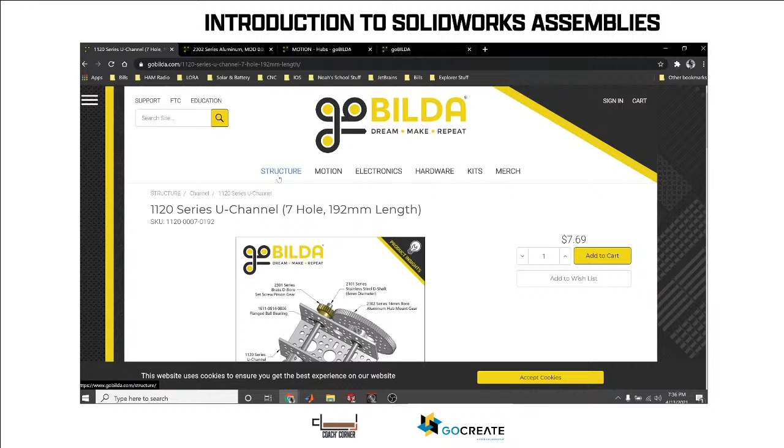But in the meantime, let's take a look at using some of these parts to make an assembly. I just wanted to start with something really simple. So when you go to their website, you'll be greeted with various types of components. If we go to structure, you'll see they have various types of rails, beams, tubings, couplings, pattern plates, all that stuff.

We're gonna dig in - I'm gonna put my do not disturb on. We're gonna dig in for now on the channel, and scroll down, and right off the bat you can see some of their application photos. We're gonna go ahead and go to the Series U channel, and take a look at this 3-hole length.

What's really cool, and what turned me on to this product, is they not only give you specifications for the channel, like drawings, but they also give application examples. They literally show you examples of how to do various configurations of the product.

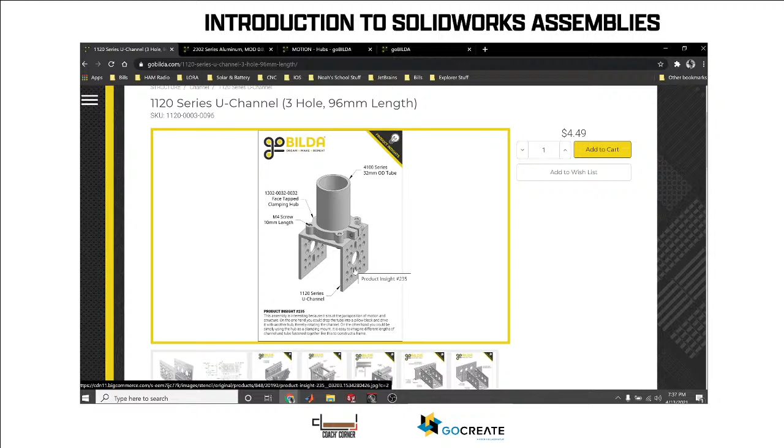I'm just clicking through these quickly. There's something where you could take a tube and adapt it to fit on a square platform. Here's a kind of want-to-be gearbox. They're making beams here too. I was talking to Brian, the guy that owns this company, and he mentioned that when you put these together as a beam, they can support a lot of weight—he was prototyping something that held the weight of a corner of a vehicle. So take that and put it in your back pocket, okay?

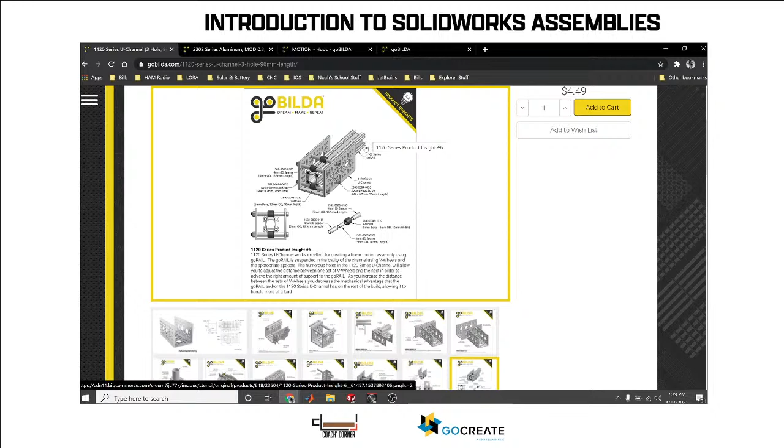These are just application examples, so if you're trying to get an idea of how you could use this—right off the bat I can see this and think, holy cow, I could take this and build this assembly using a very long piece, and now I have a camera slider. If you're looking for that super buttery smooth camera footage where you can pan across a scene or zoom in and out like a camera dolly, you could build it with these parts.

Today we're going to attempt to recreate this construction. And by attempt, I seriously mean attempt, because I don't think I correctly identified this gear, but anyway, let's get right into it.

We'll start off with our first part. What I'm going to do is go to the New dropdown and say New Assembly. Right off the bat, as soon as we hit New Assembly, we're greeted with Begin Assembly on the left hand side, which says select a component to insert and place it in the graphics area, then hit OK to locate it at the origin.

Or top down using the layout with blocks, parts may then be created from the block. We're going to keep this hopefully relatively simple. This part, 1120-0003-0096, should be our rail, so we click that and it's now in our graphics area.

But here's the kicker—you'll notice as soon as you put this first part in, it's got this little F that signifies the part is fixed in location. And if I hover over the origin for the assembly, the origin is way over here, but the origin for this part is way down here. So that may not work for what we want to do.

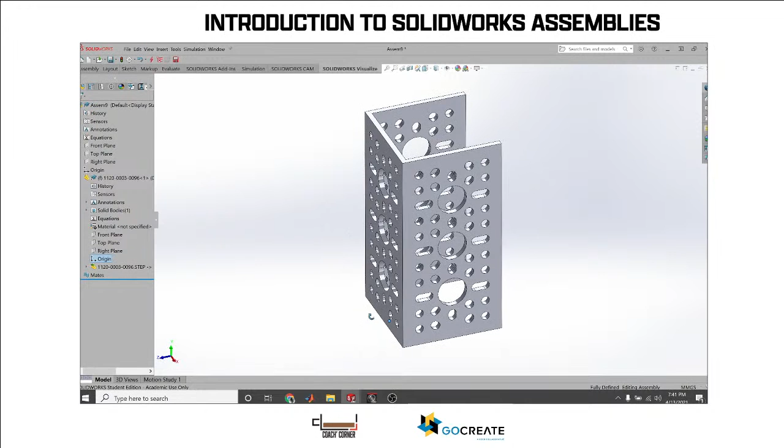Let's say I wanted this part, and this center circle right here, to be aligned with the origin of my assembly over there. Now we're about to learn the wonderful world of assembly and mates.

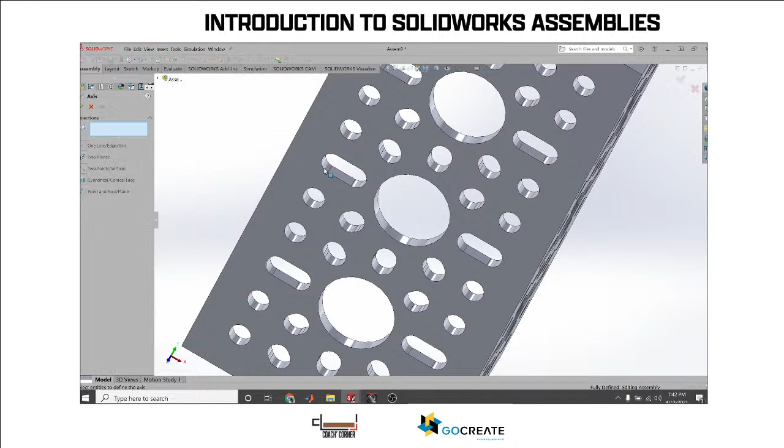The first thing we're going to do is create some reference geometry on this particular hole. I'm going to click a point and try to see if I can just place it—maybe not a point, let's try an axis. Cool, so we get this little yellow line that gives me my axis.

That looks relatively promising. Let's see if I can—first let's just look at it from a view here, a top-down view. Oh actually, that's not what I want to do at all, guys. Let's get rid of that axis and make our first mate before we get too crazy.

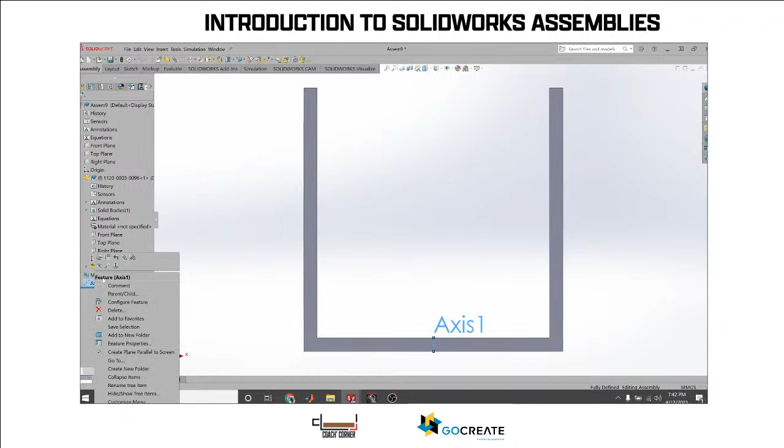What I want to do is mate this face with the top plane, but it's not immediately shown, so you have to click this dropdown on the left and choose the top plane from the assembly, not the part. So we click here, and we're going to make it coincident.

Oh, you know why it's not going to work? I'm sitting here going on and on about fixed. We need to make this float first. Okay, so now this is floating. Man, I'm just really messing you guys up today.

So we mate, then we pick our top assembly, and there it goes. It snaps to align with top assembly, and it almost kind of looks now like there's a floor, because you see that reflection over here off to the side. So I like that. I'm going to go ahead and click the check mark to accept that.

And then I'm going to pan, holding the control key on my keyboard and clicking the center scroll wheel on my mouse.

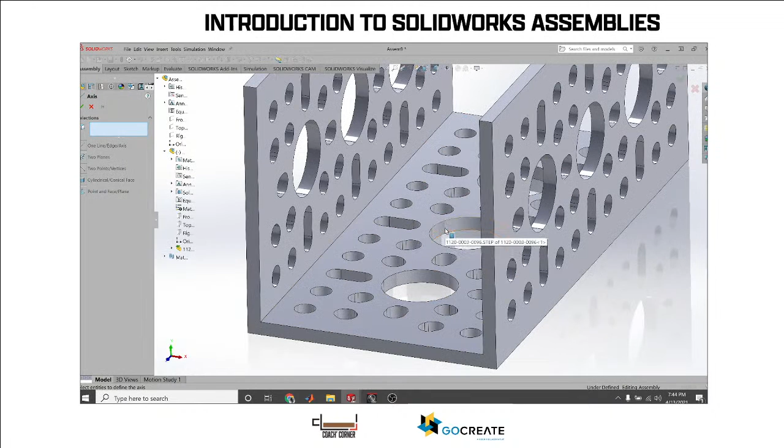And let's try again to create an axis here. So click axis. We will go... actually, dude, I want to do one more mate, I think, to make this like super cool.

So what I'll do is I will actually create a plane between this face and this face, and you'll notice how the plane automatically is smack dead in the middle. So I like that, and I'm going to go ahead and hit OK because that's what I want.

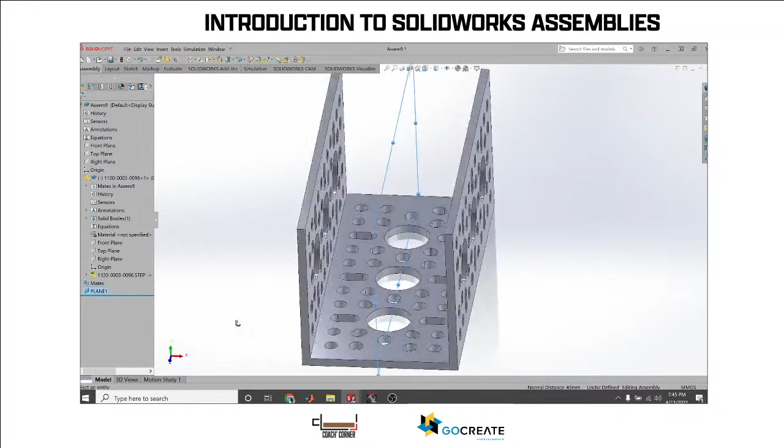And then I think I could do one more plane instead of trying to do the center point right here, that would help me align this a little better. So I'm going to click on this face, oops, let's delete this as our reference, and we'll click on this face. And again, now I have my plane directly in the center of this part, so I'm pretty happy with that.

So let's make this front plane... oh no, sorry guys, getting ahead of myself again. Let's erase that plane. We don't want that plane there. We do not want this plane right there.

Okay, what we actually want to do is edit this part. So we right click on the part, the super long convoluted name, right click on that, and then we go to edit part.

So please save it before editing imported component. Okay, so I'll just go ahead and save this as, we'll put it on my desktop for now so I don't get it mixed up with anything. And we'll call this GoCreate-GoBilda...

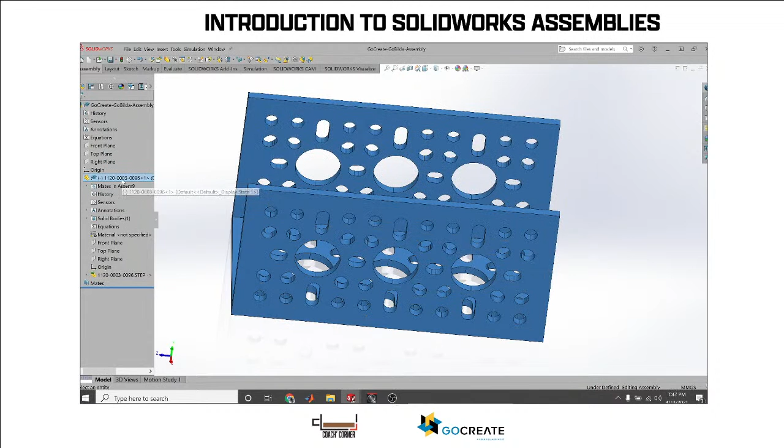Cool. Now I'll try to edit my part. Awesome. So here we go. First, we create reference geometry.

So create a plane. We want to select this face, and we want to select that face. And again, it's right in the middle, so we're happy with that.

And then I'm going to create another face between here. So we create a plane here and here. Got that centered. Cool. So we should have two planes, 1 and 2. Perfect.

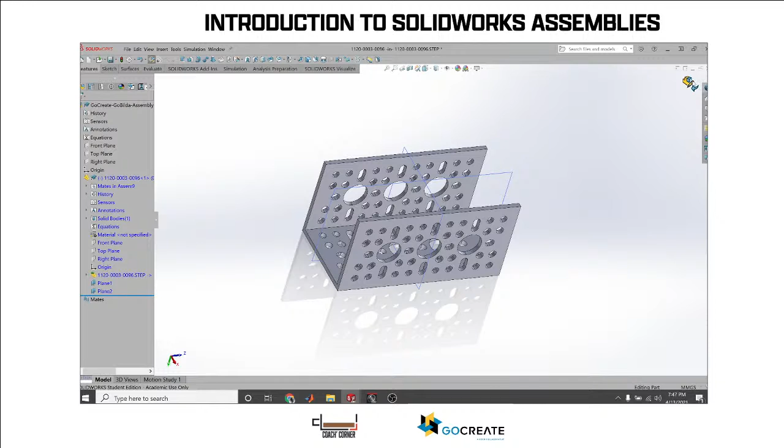To exit editing this part, we'll go ahead and just use this little icon up in the upper right hand of the graphics screen. So we'll exit the part.

Alright, cool. So now I'm going to take this plane, click on the mate. This is like a little flyout menu, so when I click it, there's a flyout menu, so we click mate, and we are going to mate this with the right plane.

Nope, the front plane. Perfect. We accept that one, and then we click on plane 2, and this one will be aligned with the right plane. Perfect. Like it.

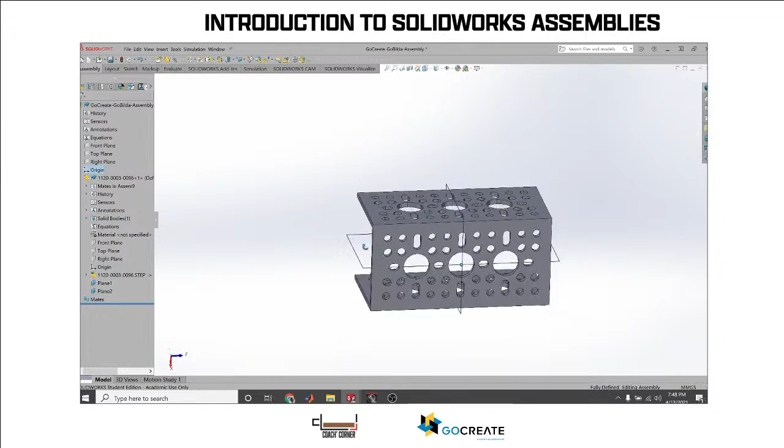Awesome. Now, if we take a look at origin, our origin is literally smack dab in the middle of the part. So I'm very cool with that. Actually, it's in the center of the bottom of the part, but I'm not going to continue pursuing this.

So we'll hide that plane, just keep things decluttered. Alright, awesome. Now, let's bring in another part.

So we'll go to our assembly, and up in the top portion here, we can insert components. But before I do that, I want to make sure that I've got the right stainless steel 6mm. So it's 2101.

So what we can do is go to our SolidWorks. We're going to go to File, Open. I've actually got all of these things saved, so it's going to be a little bit easier for me to find what I'm looking for, I think.

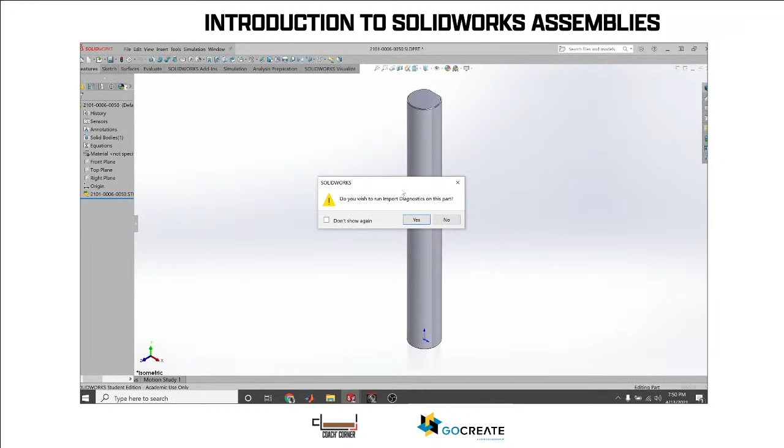So goBILDA shaft, D-shafting, and I think they are talking about a 6mm, so it should be 6mm. And I'm just going to take a wild guess. Pick. Yep, okay cool, and awesome.

So let's go back to our assembly. And up in this menu area, there's the little icon that says insert a part or insert a component. So we'll click that, and we have our opened parts to choose from. So let's click that. So there's a bearing.

I want to click that one more time, and let's see what this one is. This is a shaft.

Let's see, what is this? This is a pulley, or sorry, a gear.

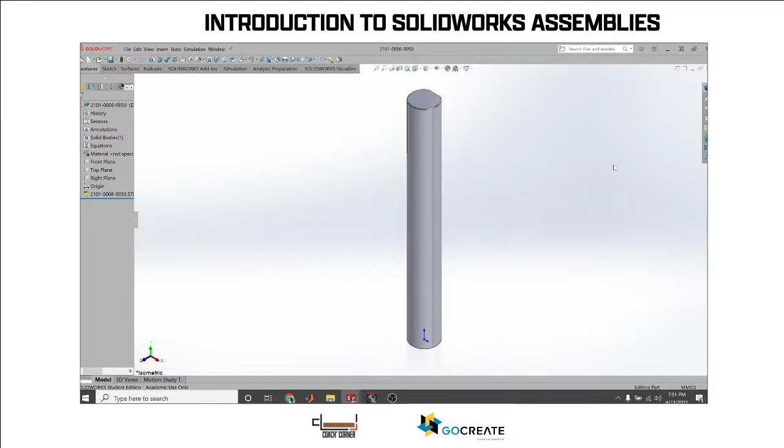I should be seeing some more than that, so let me. Okay, so this needs to be saved. I need this gear here. Also need this as well.

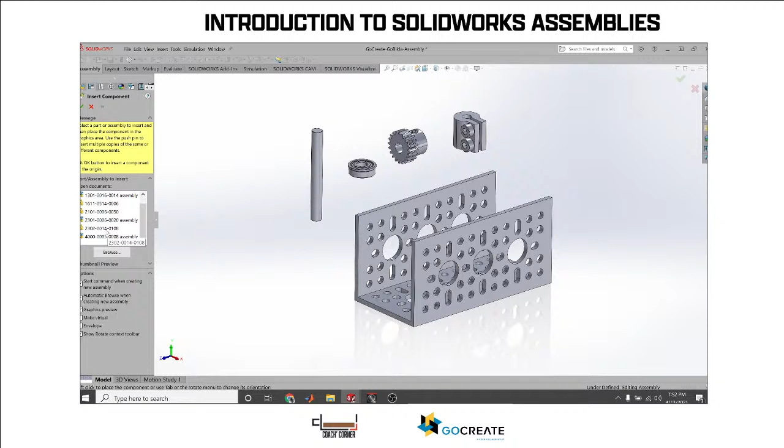So now if I go back to this assembly, I wonder if it'll let me. Yes, yes it will. So here's our clamp hub thing. We need, what is this? A gear.

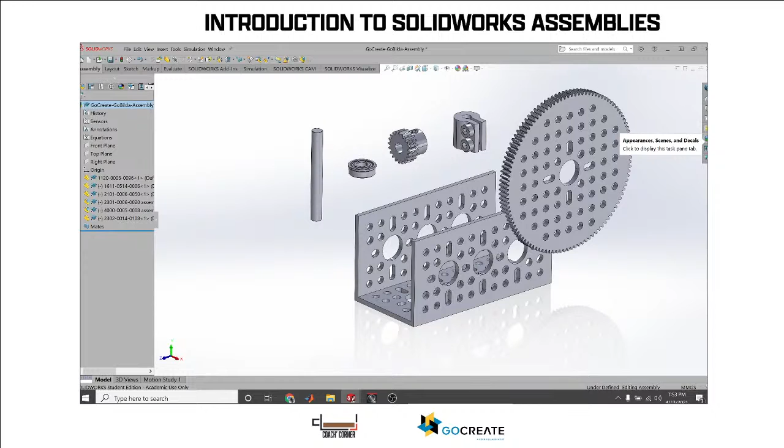To make things a little bit easier on us, I'm going to adjust the colors on all these various parts. On the right hand side, you'll notice this flyout menu with the multicolored ball. It says appearances, scenes, and decals. I'll click that.

I'm going to go to painted. This should give us enough options, so I'll make the rail be this blue color. I'll make this gear be a nice cool gold color. I want to do the same thing with this gear here.

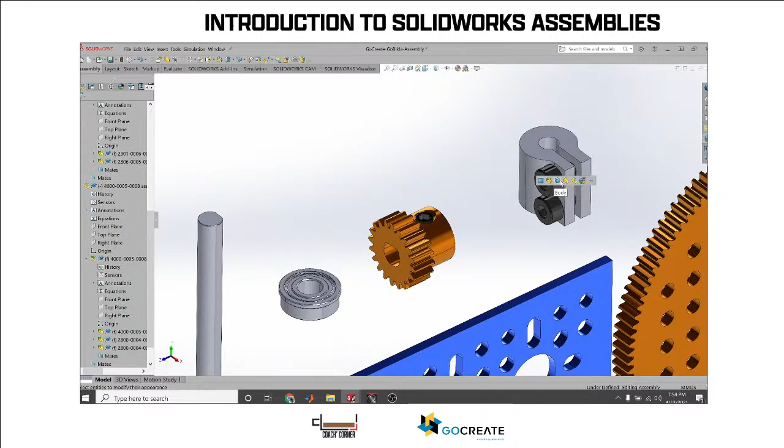And you'll notice, if you really want to get super Gucci with it, you can also change the hardware color. So now our hardware has like a cool anodized look to it.

Let's leave our bearing silver because, why not? So let's do this metallic cool gray on that. Same thing with that there.

Okay, awesome sauce. We have all of our parts, but you may notice that they look like we need some extra parts here. So let's highlight some bearings because we know we need 4 of these.

So we'll hold our control key and hover over the title and drag a new one on. We'll place it right over there. We'll do this again, and we somehow got ourselves 2 because we were holding the control key and doing that.

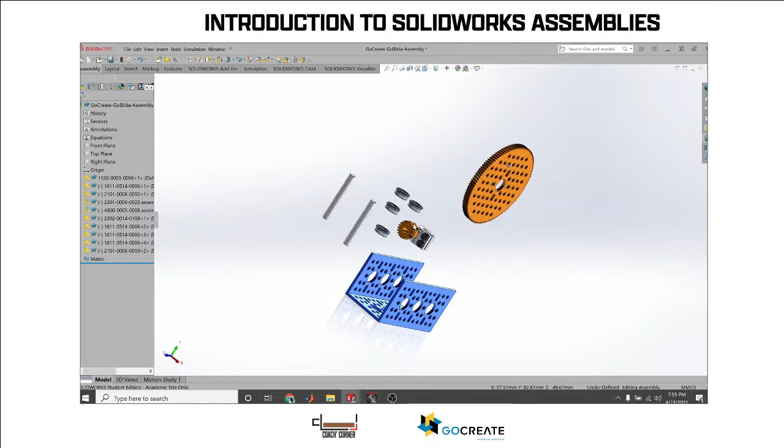Let's see, I need 1 more of these shafts. Full disclosure too, guys, this gear may be entirely too big for the meshing of these gears to take place, but that's neither here nor there.

So let's start with making a mate for the bearings. To do this, we simply click on our first face. This flyout menu comes up and we'll click mate. Okay, and then I'm going to click on this round face here.

I could click on this circular line, but because I clicked on this face, I want to click on this face as well. You'll notice that it kind of infers, either on this flyout menu or the one to the left, that it's seeing 2 round objects. These things should probably be concentric.

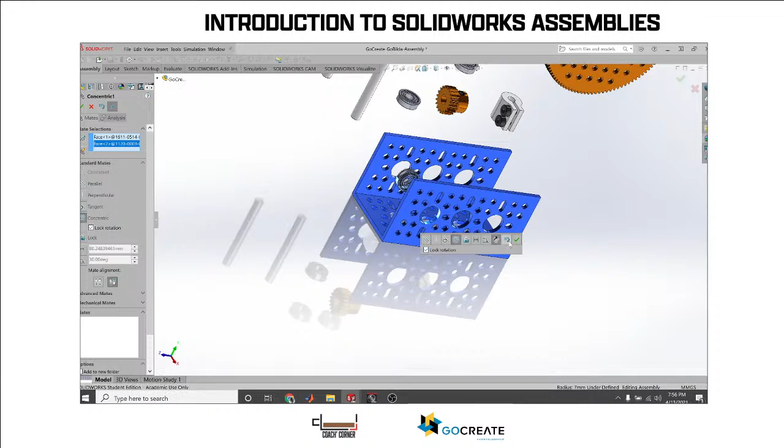And in this case, they're correct. We definitely think these should be concentric. And then, of course, you can lock the rotation. So for now, I'll hit lock rotation and the check mark to approve this mate. Then I'm going to come over here, zoom in still, and get this face.

See if they'll let me. Yep, get that face. And then I'm going to come over here and hit this face. You'll notice that it infers it should be coincident, meaning they are in the same place where they meet. They don't intersect each other, but one face mates to the other face. So we'll hit add or finish mate.

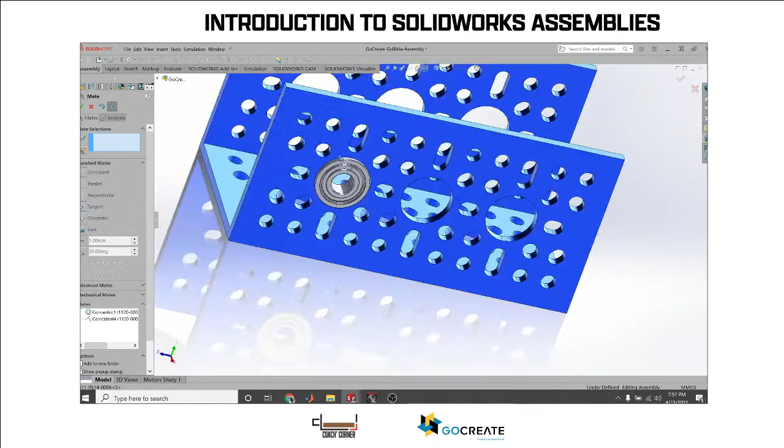And we have our first bearing in place. I would like to add that these bearings, I think the GoBilda people actually have bearings that have a D shaft, but I could not find it in their repository, so whatever.

So you'll see that it's locked. Like, I'm trying to spin it, but it doesn't want to spin. Okay.

So what if we wanted that to spin? Well, first, let's take this and fix this again so that it would spin theoretically. But if you really wanted that to spin, this bearing's outer sleeve may not spin - it would probably be fixed in place, but I'll just click this.

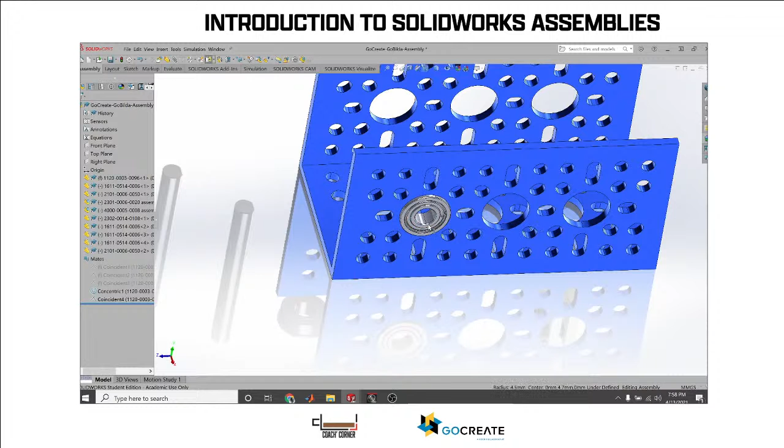I'll right click it and hit edit feature. And then here you can just unclick lock rotation, check mark once more, and now the bearing is moving. But I don't like that, so I'm just going to lock my rotation back up.

Okay, let's do this another 3 times. So we click our face, we mate, let's click this face here, lock rotation, and I like that. I want to get this face here, that face there, coincident. Okay.

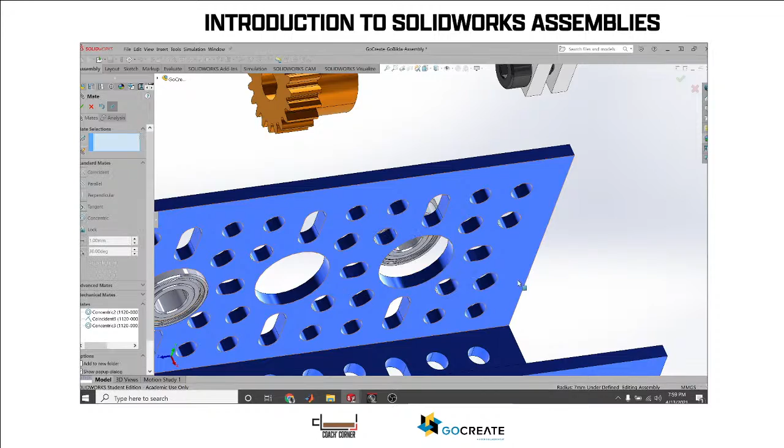That one, lock rotation, accept. See, I can just get that face. Nice. That face, accept. This face here, lock the rotation. And I can do this face first if I want, and it goes transparent. So now I can just come over here and say, right there. Notice how I click through.

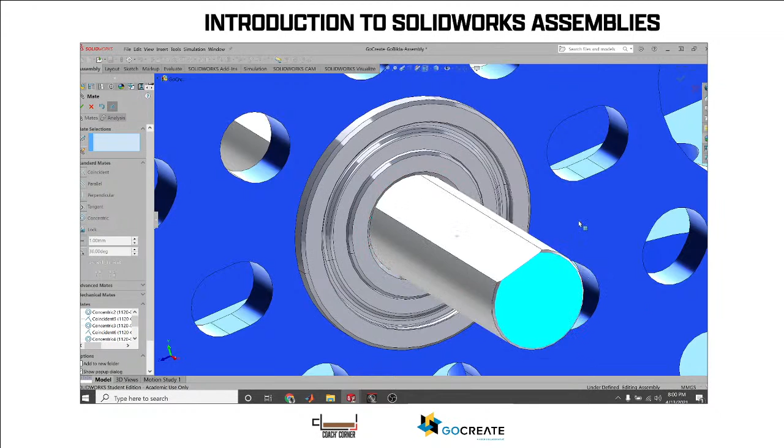All right, super cool. Now let's try another mate. Let's see what happens if I click this face and I click the inside face of this. It will again make it concentric, but this time I'm not going to lock the face, and you'll notice I can spin it, and I can also push it in and out while I'm spinning it. So it still has some degrees of freedom that we can lock down.

But for now, honestly, I think what I need is probably some longer shafts, because that's not going to be enough. So let's go here, let's click browse, GoBilda shafting.

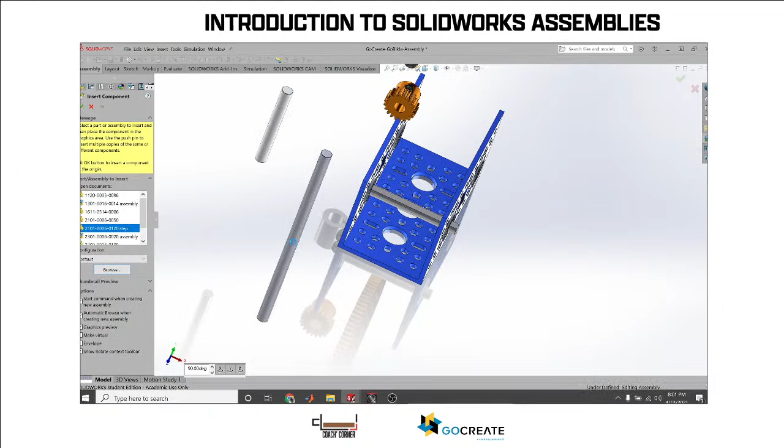Okay, shafting. I'm gonna change my filter. Let's get something gnarly, let's get 120. That's gonna be entirely too long, but I don't care. So let's see, let's drag on this cool metallic color. That seems legit.

What part is this? We'll go ahead and get rid of this part and accept the deletion of this concentric mate. Same thing here, get rid of that. Yes, okay. Control click to get two of those bad Johnnies. Perfect. Click this face, fly out menu, mate. Concentric, not locked rotation. Let's do that once more.

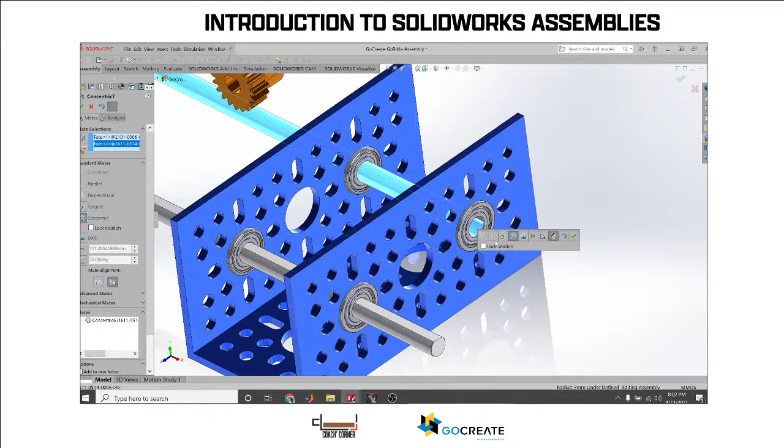Okay, let's take and add our gear to—ooh, let's not do that. Let's clear that selection for now. So on this first gear, it's got this little D-shaped bore on the inside there, and that prevents this gear from slipping on the shaft. So we'll obviously want to take this flat face and then come over here and select that flat face.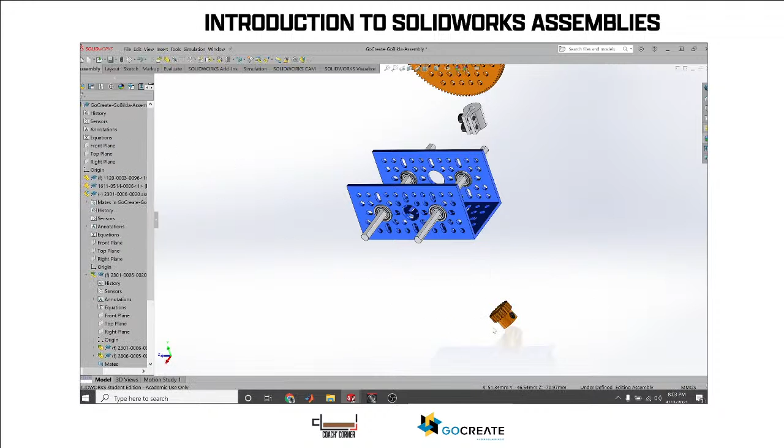And yes, that should probably be concentric, I think. No, there's some weirdness going on there. So let's go and get rid of that last one, let's get rid of that. Yes.

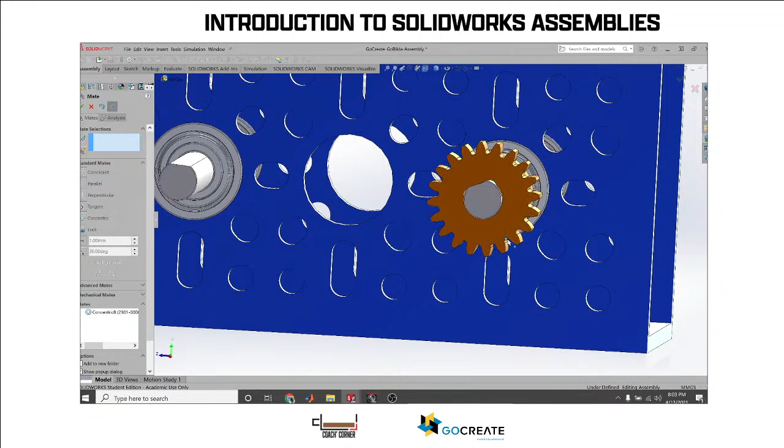I'm gonna make an attempt to say concentric. We'll flip directions, hit OK. But now it's not. Let's see if we can do this.

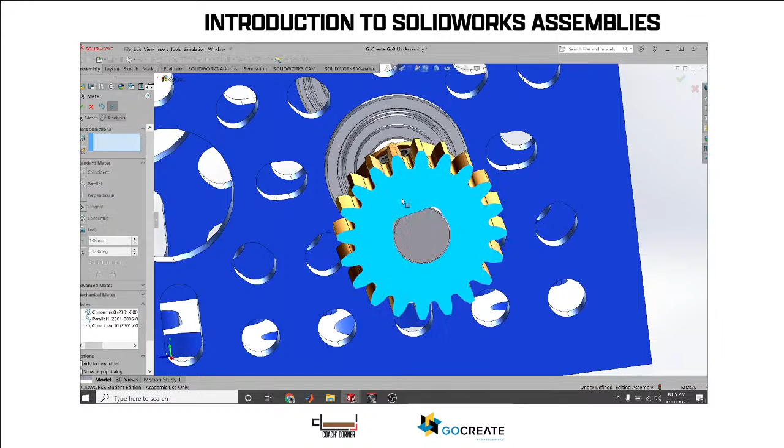Cool. So while I was muted on the mic, you can see that I did manage to constrain this flat face to this flat face. So now that kind of works in a realistic thing, but I need to constrain some more degrees of freedom, so I'll click this face and this face and say I want these faces to be coincident. So we've got that locked down fairly well.

I will, for the sake of argument, just click that face there and this face, and that will keep that coincident. And hopefully—yep, it still rotates just perfectly fine. It doesn't slide around. I think really, honestly, you would probably want to take this guy and see if it fits on this guy.

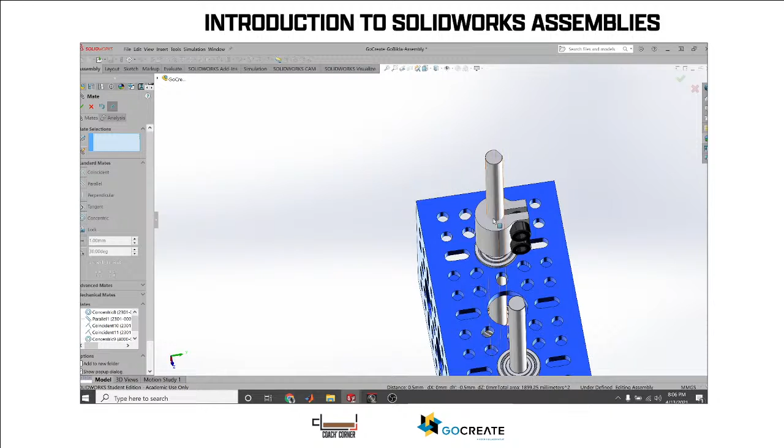Fits on this guy. Lock the rotation. Then just put this face on that face.

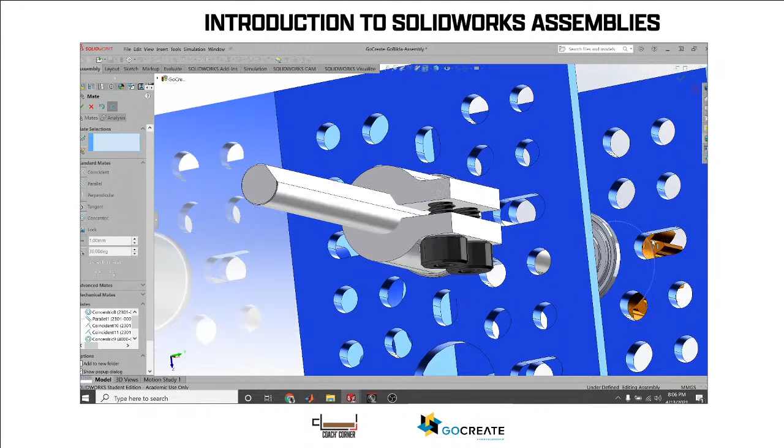So if you were twisting that, now that whole piece moves, and it's a bit sloppy because I don't think the ID of this coupling matches the OD of this shaft, but I was just kind of trying to quickly find all of their parts and make some kind of assembly video. But either way, you can see that when this assembly is rotating, so is the whole shaft, everything is being fixed as if it were being clamped onto the shaft, so that's no problem there.

I still need this side to be done, so oh, that's what I'm missing. Let's add more parts. I have a couple of these that I need, so let's get this, bring that out.

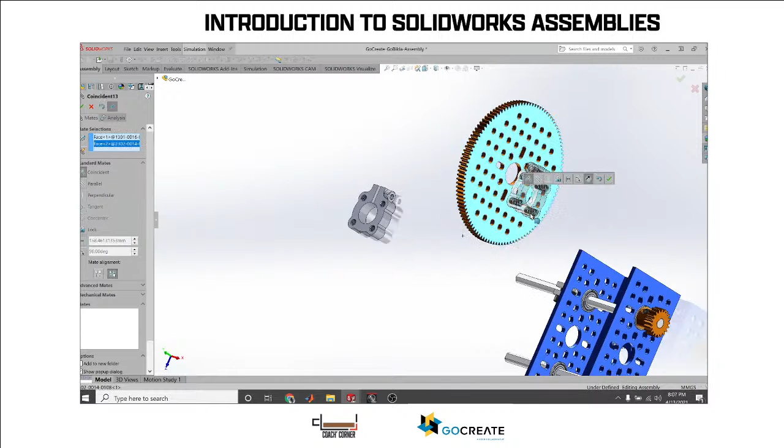All right, so let's do this first. Let's take and mate this—oops, that face. Let's mate this up with that face. Okay, we'll hit all right.

Slide that over, and we can see that this is probably an easy one to hit, so we make that concentric. And because it already lines up well with the holes, these 4 holes, I'm just going to go ahead and cheat and hit lock rotation.

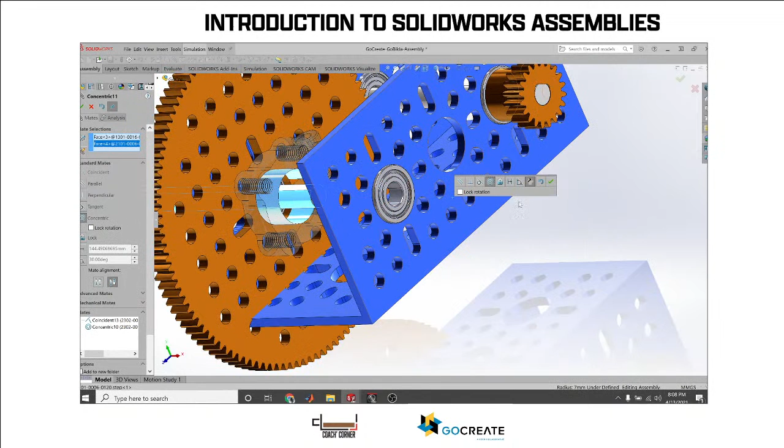So now that works. And then what I want to do is attempt to put this guy concentric with that guy. Wowzers. Let's flip that around.

Yeah, that's clearly not the right size clamp. Very much not the right size clamp, but we'll make those coincident. Let's just pretend there's a perfectly sized grommet in there that's locking that rotation, or keeping that space perfectly. All right, so we got that.

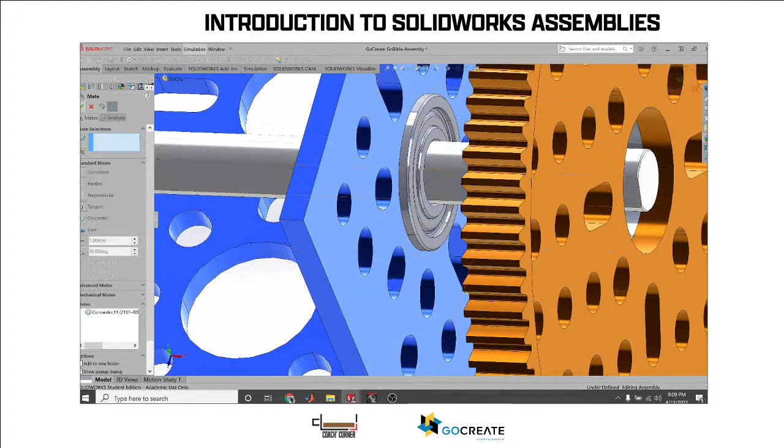When we rotate, we need to lock this up somehow. So let's do this. Cancel. There's a mate down here that needs to be coincident. Let's edit this one, unlock its rotation, click the check mark, and there we go. Now it's perfect.

So we click that face, mate it there, mate it there. That looks acceptable. And then we have our super monstrosity of a clamp that doesn't fit over here, so we'll just put that on. We'll say yes, and then we will mate that face with that face. Okay.

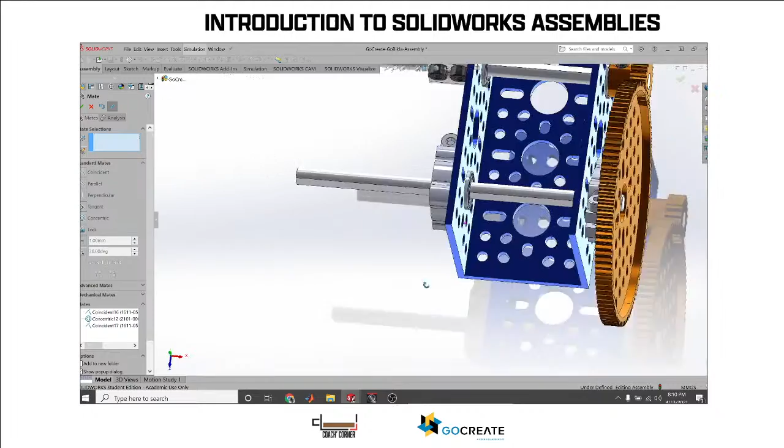And yeah, like I said, this gear is not the right size to this gear, and I would just have to go and find the right size gear and obviously better hubs to make that a little bit more realistic.

And then there's also a little thing we can do to make the gears play nice. Like in real life, we know that if I spun this gear would react. So maybe I'll pull that up in a separate live stream when we get a bit more into it, we're gonna study some scientific gear ratios and such.

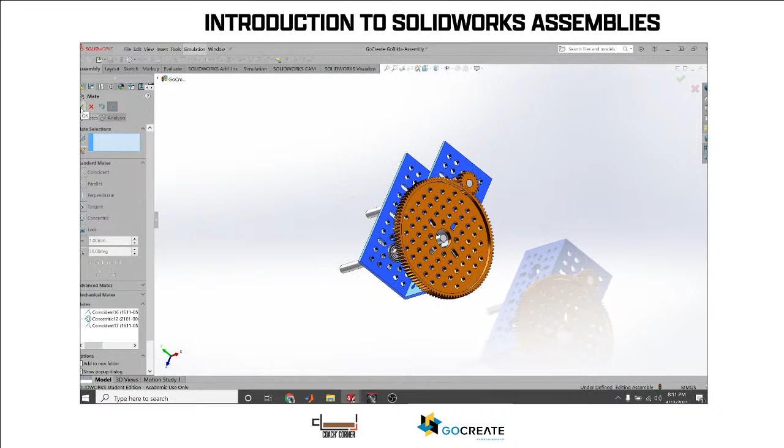But anyway, I just wanted to jam through this assembly stuff so that you can get an idea of how you can use those easy to find parts. Let's see, I want to find this. Which one is this? Get those easy to use parts, and then maybe jam out a quick little innovation, right?

So let's see, where is that gear? It's this one, it's a 108. So let's see if I can get a 90. So we go to gears, 2302, all files. Let's get a 90. I wonder if a 90 would fit.

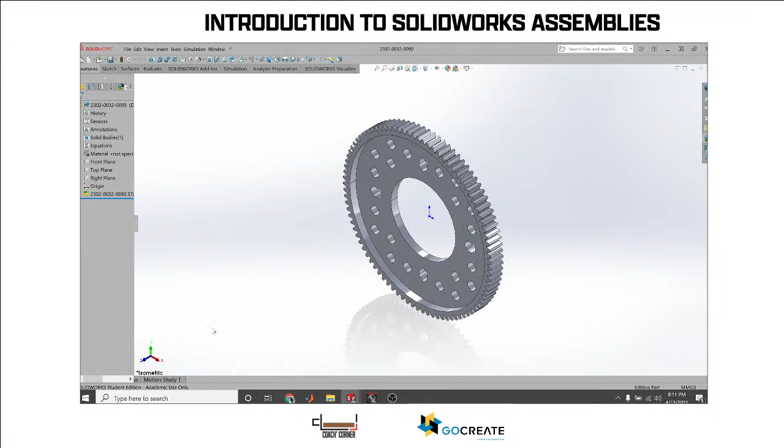I don't think it was that. Maybe it's... let's see, let's do an insert. 90. And of course this hub is way too big. Let's face this up with that, make that concentric and just look. So it probably needs to be a 96.

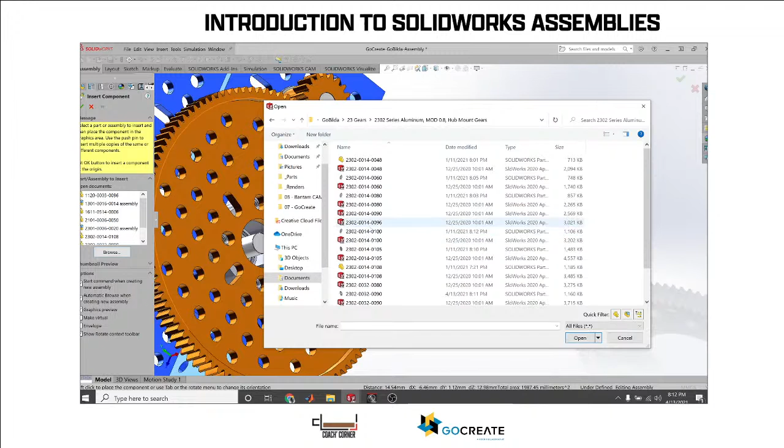So we'll cancel that. Let's do insert part, browse. 2302, 96. That looks a tiny bit more promising.

So first of all, let's get rid of this one. Hit yes. And then let's get rid of this 108 for funsies. Yes. Let's mate this with that. Flip it. Finish mate.

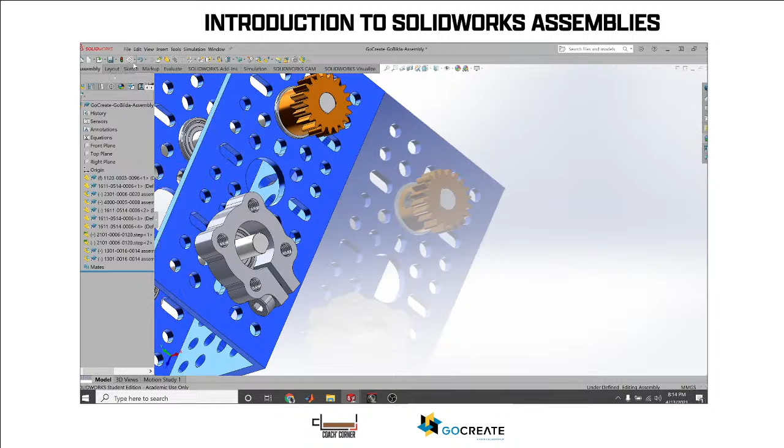Nope, it is not the right size one, so let's take this part, let's get rid of it, let's put the 100 in there. It has been a hot minute since I've played with GoBilda stuff. Yes. Insert 2302, 100. Yeah, I think this has got a better chance of working out.

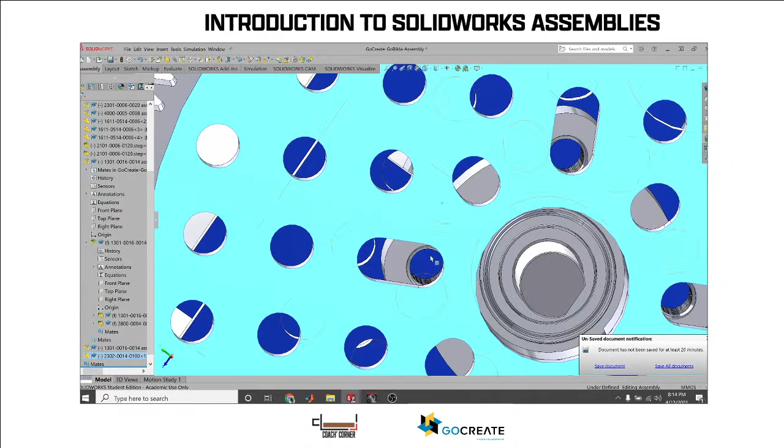Let's make that concentric. Hit OK. Yeah buddy, that's what I'm talking about. So in theory, that's a more realistic gear situation. And I was playing with these gears in my shop because I went out and bought a bunch of them, and it's funny because you can actually take and assemble this gear system. You can assemble a bunch of them and then stack them on top of each other, and it will do the whole gear reduction or vice versa.

And it's kind of fun because you can really do some experiments with speed and torque. But anyway, so we have our assembly. Hooray for us, okay. Now, just because I am all about rebuild and save, I'm going to go through one extra step here.

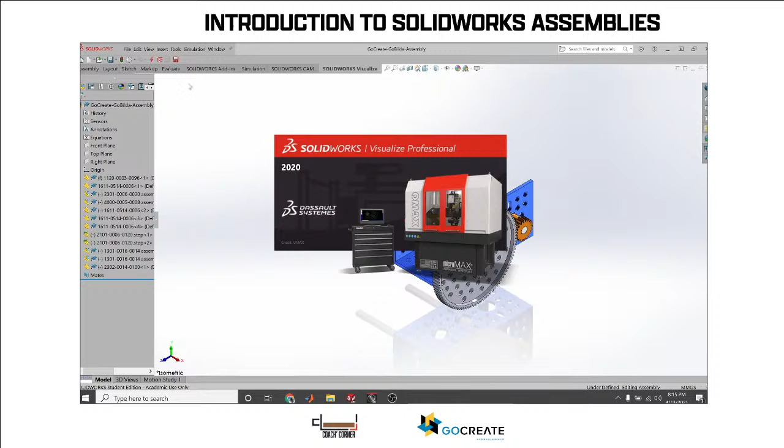And this is a completely worthless, well, not worthless step, but completely unnecessary, unrelated to what we're talking about. So I really want to do visualize, so I'm going to go through the SolidWorks visualize export process. I really like doing visualizations, doing really cool renders.

Let's see, let's take our camera. Let's readjust that. Let's zoom in some.

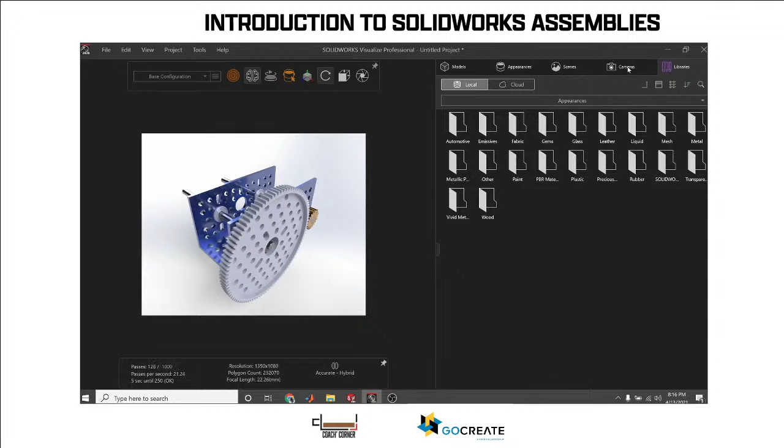So the whole visualize thing, it's a really fun tool that you can use if you're trying to make a really cool digital representation and print it out. Maybe you make a product in SolidWorks, and you just want to show it off without actually having to build it. This is the way to go.

Let's see here, I'm going to go to a new environment, new HDRI environment. Let's go with a blurred studio, see what that looks like. Delete.

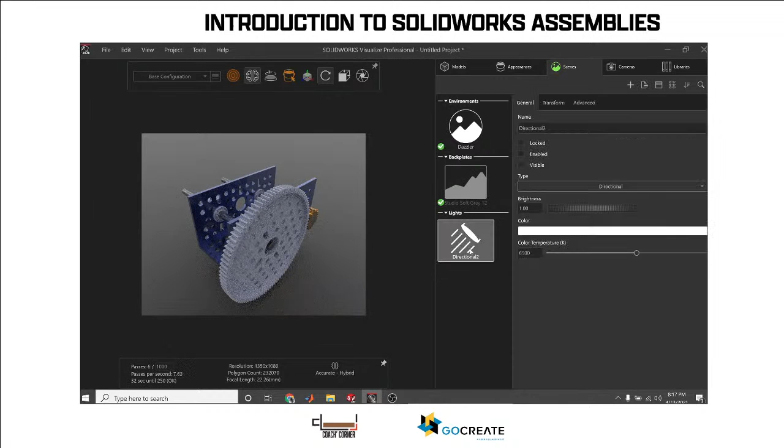Cool, kind of, not terrible. Okay, so I've got an environment. I'm just gonna get rid of some of these extra things that I don't need, just to declutter things a little bit. Get rid of this light, and that light.

One of the things I like to do when I'm doing these renders is add my own lights. So what I'll do is look at the part as if I'm a light bulb, and I will add a new light. I will match current camera, and then make a color. So we'll give it a red, kind of like a red glow. Maybe turn my brightness down a skosh.

Alright, and then I come over on the top here. I'm gonna add a new light, match current camera. I'll add a second one over here. Add a new light, match current camera. Make this one a blue color. Super cool.

So now I got that blue, I got my light that's coming up from the top, and I got my red.

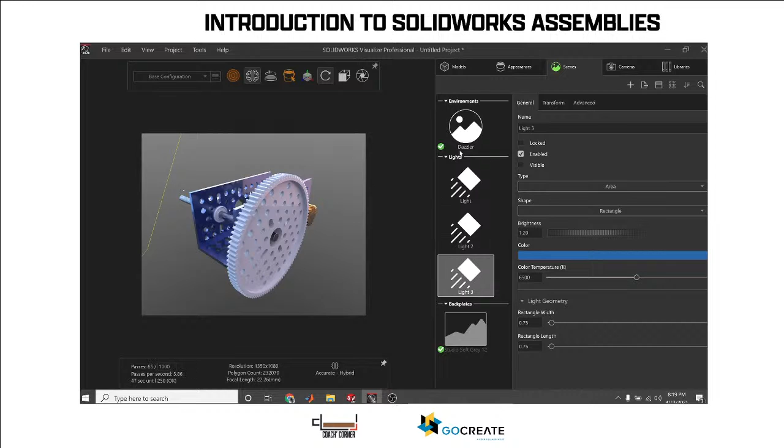So let's go to my environment. Let's flatten our floor. This environment actually looks really lame, so let's try another one. New HDR environment. Directional light. Nope, don't like that one either.

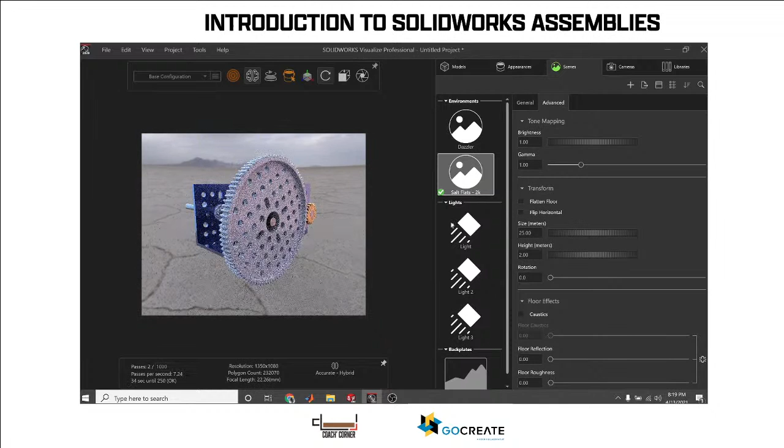Let's see, environments. Let's try this one. It's not awesome, but it's better than nothing. So we just flatten the floor to make it look like it's on the ground. Almost kind of looks like there's a sunset back there.

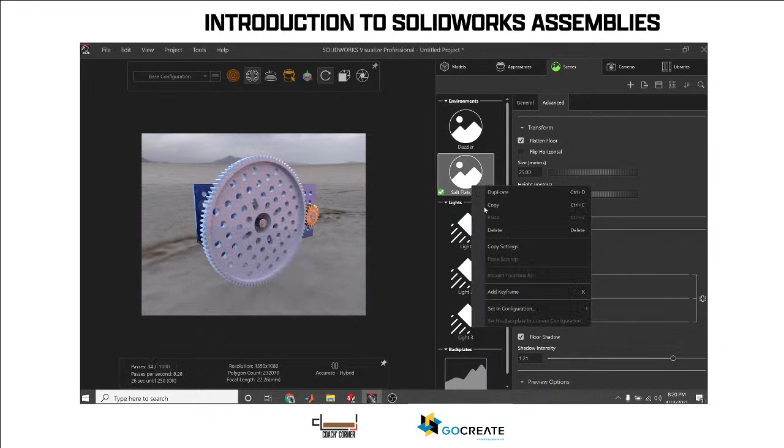Kick up my floor shadow some. Man, I'm just not digging that at all. So now it makes it look like this thing is sitting on the floor in this super Gucci interior.

So let's flatten the floor, turn on floor caustics. So now it's being reflected. We can see our blue light and our red light being reflected in the floor as well. That's kind of lame, but that's what you get when you do the floor. Let's turn the floor roughness up.

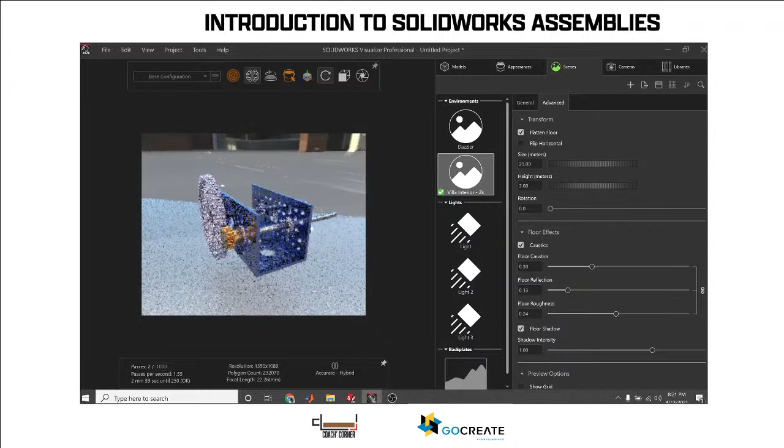Alright, so once you are done playing with that, then you would come over to the output tools, render it as a JPEG, and hit start render, and it begins this process. Depending on how complex, how many shadows and stuff like that, dictates how long it actually takes to render. So while I'm letting this one render out for 7 minutes, allow me to bore you with some more talk.

So this week and last week, we covered SolidWorks parts and SolidWorks assemblies. I'm thinking next week I will go into playing around with SketchUp, even though GoCreate doesn't have SketchUp, because I think you might find that tool valuable to use. Maybe you're trying to plan how your startup store is going to look, or doing some garden planning, or in my case, I use SketchUp a lot to design rooms in my house, because my wife is super fiscally responsible, and when I'm trying to pitch an idea, a lot of times it's easier for me to render it and make a 3D version of the room I'm getting ready to remodel, so she can see it, and it helps get her more excited about it, and thus allows me to go to Lowe's and spend some money on projects.